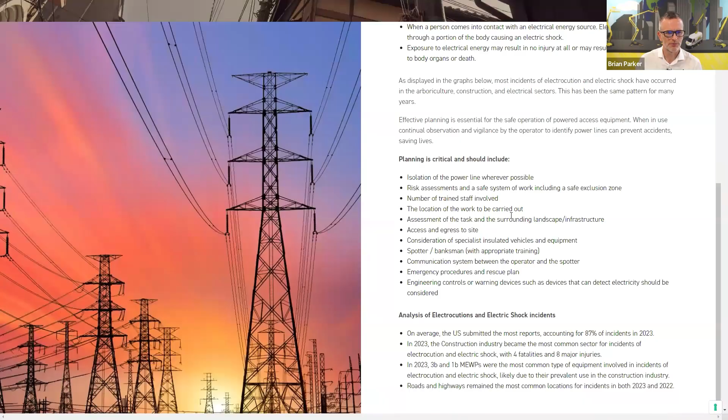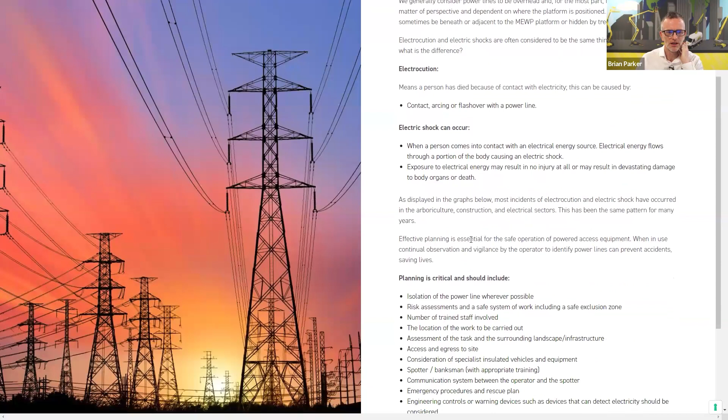So as it's first on the list, I'm going to pick electrocutions and electric shocks. Remember, I could have jumped straight down to there, or I could jump back as I wish, like you would do when navigating a website. So some headline data, some examples and definitions of what we'd deem as electrocutions or electric shocks, and then some information about planning and analysis.

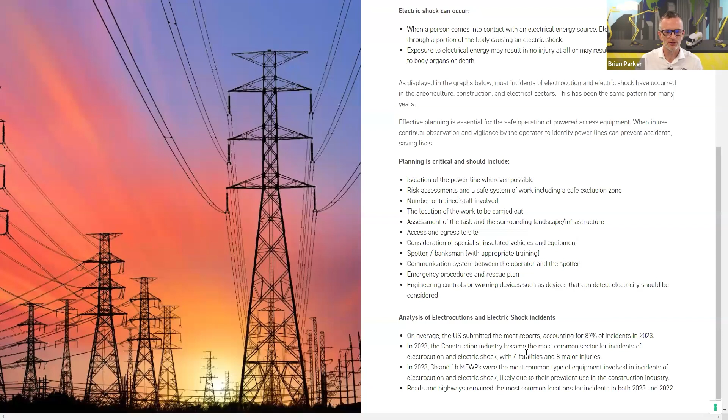One thing I'll point out is the relevant countries - earlier on the pie chart, you'll see the US submitted the most reports, in this occasion 87% of incidents. This data isn't normalized, meaning the US market is vast - one of the largest industries over there. We're talking 1.3 to 1.6 million machines over there, whereas another country might be in the hundreds or thousands. So as industry stats, just to make sure you're clear on that.

Okay, again because I've had the report up, this doesn't count up, but this would count up to give you an indicator of what it is. And we've also got whether we've got an increase or a decrease. You can see on the previous 2022 data, the increases are accordingly there.

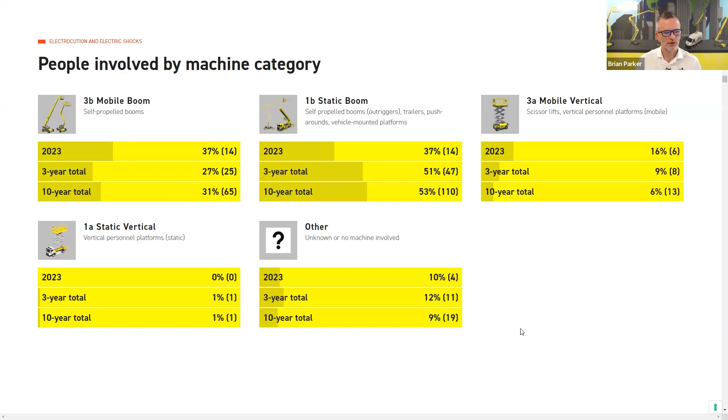So then we now move into the machine categories, a slightly different chart to give you an indicator of the types of equipment over that period. You can see in terms of 2023, the booms, scissors, verticals, and the 3A and 1A static verticals. And then when we come to countries, you can see here another bit of information on where the countries are.

As I said, US - this isn't normalized data. And then when we get to electrocutions and sectors, this is where we can start to look at different data over different periods of time. If I want to look at the 2023 data, the latest data always appears on the left, and then we can switch between various data sources to get an indicator of what's going right, what's going wrong.

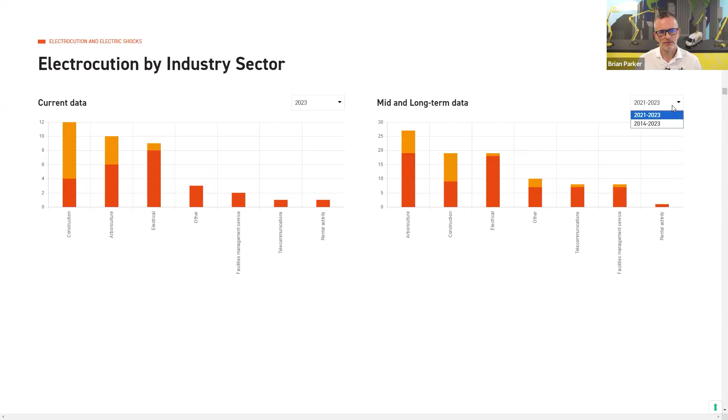You can see construction down here - 4 fatalities, 8 major injuries - but in the medium long-term data we had 19. And then the long-term data, 38. So it gives you a bit of insight there.

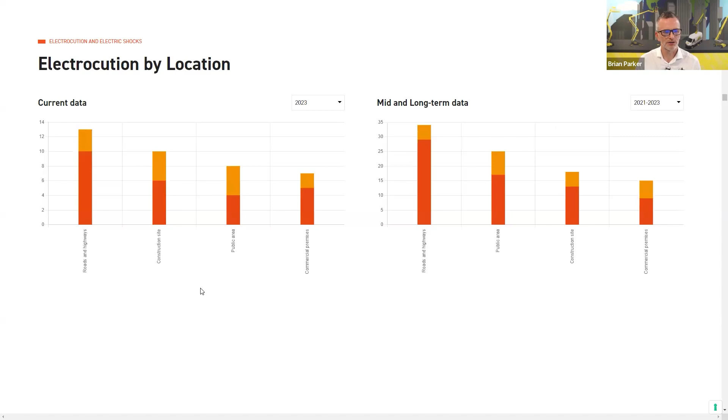We also have it by location, giving an indicator of where incidents occur - roads and highways, construction sites, a public area, or commercial premises. And then we also have resources available.

Incidentally, when you're on here, you can look for technical guidance. You can put in here what you want to search - you might say I want to look at harness - and it's going to bring up all the data you need. So it's fairly simple, fairly straightforward. Okay, and then we move on to falls from the platform.

So I'm not going to dwell too much on them at the moment, but as you can see, we hope that we're covering everything. The one thing we've also got here is mast climbing work platforms and construction sites. For those of you involved in this sector, we have limited data in this area. We're always looking for more, and we would welcome any data that comes through. So again, some really good insights into what's occurred in the mast climbing world and construction hoists, hopefully that makes sense.

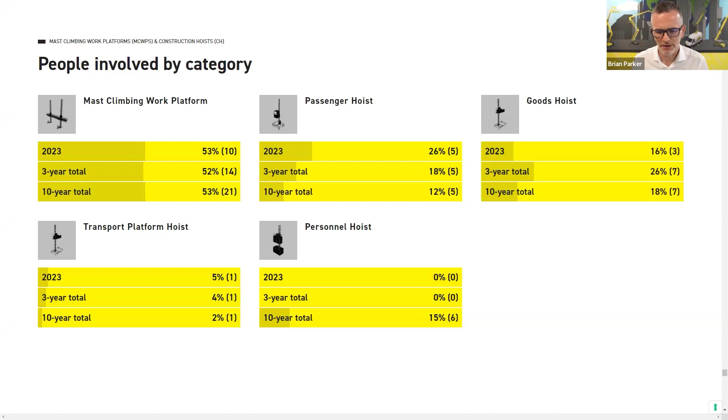I think that concludes what I wanted to show. The navigation button is really key to where you want to look. This is the first iteration of us completing this global safety report. I think we need to wait a little bit of time, see people's views and feedback, and then hopefully for future reports we can make some changes and give you more insights.

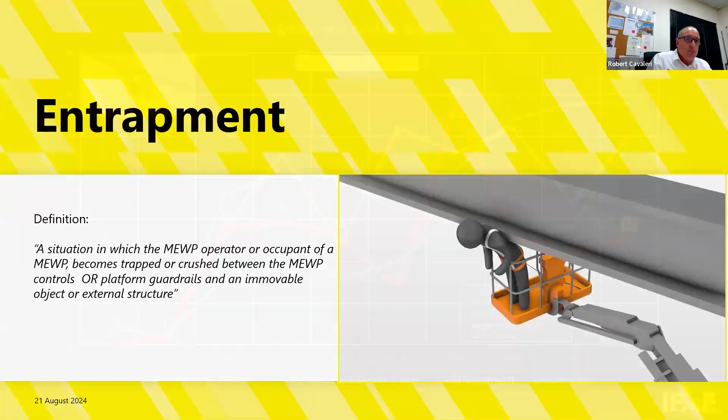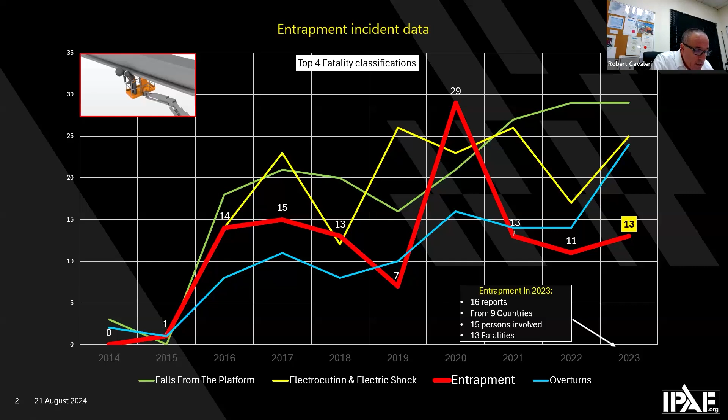In this data slide here, you can see along with falls from the platform, electrocution and electric shock, and overturns, the frequency of entrapment incidents is situated in the top 4 fatality numbers related to MEWP incidents. Next slide, please.

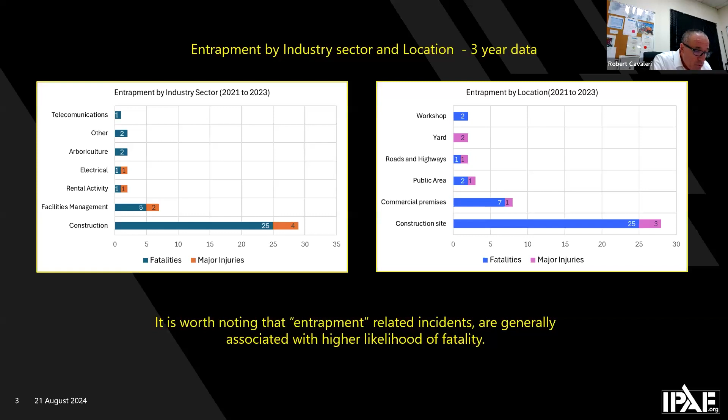On this slide here, you can see entrapment by industry sector and location, and this is 3-year data. It's worth noting that entrapment related incidents are generally associated with a higher likelihood of fatality, and that construction activity by industry and location continues to be the MEWP use application where entrapment is presenting most frequently. Next slide, please.

1, not watching in the direction of travel or movement during operation, and this can be in the elevated or transport position. 2, incorrect control function selection. 3, confined, congested area use, and lack of operator skill. 4, erratic or overspeeding control use in the driving or boom function. 5, poorly maintained equipment or using faulty equipment.

6, uneven ground surface conditions and not considering this in the planning phase. 7, over-reliance on secondary guarding, which comes under the complacency heading. 8, lack of competence for managers and supervisors in the planning phase—there's a great course called MEWPs for Managers which addresses this, one of the IPAF courses available. 9, leaning out of the platform during manoeuvring. And 10, incorrectly adjusted drive or lift function ramping gain or threshold.

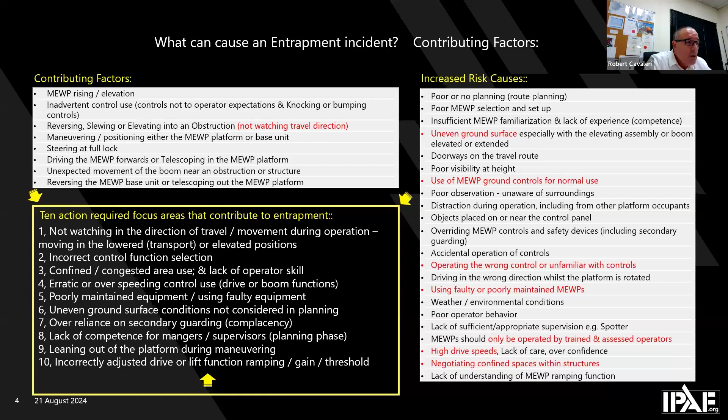That's a technical thing, but sometimes when using MEWP controls they can operate abruptly or unexpectedly. And I have 11 there as well, not showing on the slide, which is use of the MEWP from the ground controls for normal use. We should know that MEWP ground controls are intended for emergency use only and for pre-use inspections. If we're using them for normal use, we can significantly increase the likelihood of entrapment, not only for those in the platform or basket, but also for the person operating the controls from the ground station.

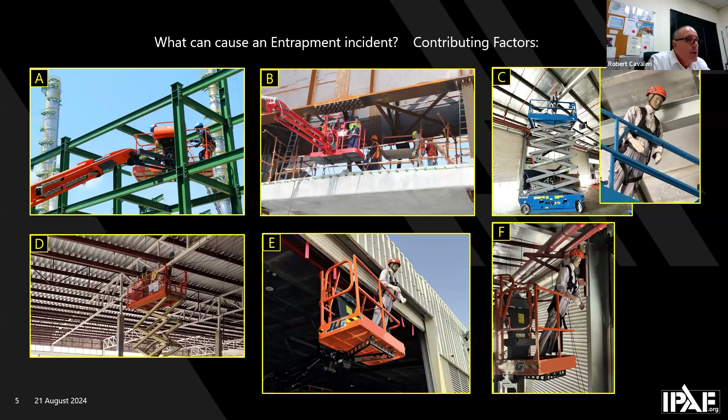Next slide, please. So we're still in causation here, and this slide shows photos of applications where entrapment could present in many industry sectors. You can see here we're looking at congested areas, maybe steel structures and beams inside workshops, maybe the lighting has been compromised as well, moving in and out of doorways or in and around congested areas. Next slide, please.

This primary guarding switch requires two intentional commands from the operator. And if the safety switch component is not working, that means the switch can actuate a function unintentionally, and that can potentially lead to an entrapment situation.

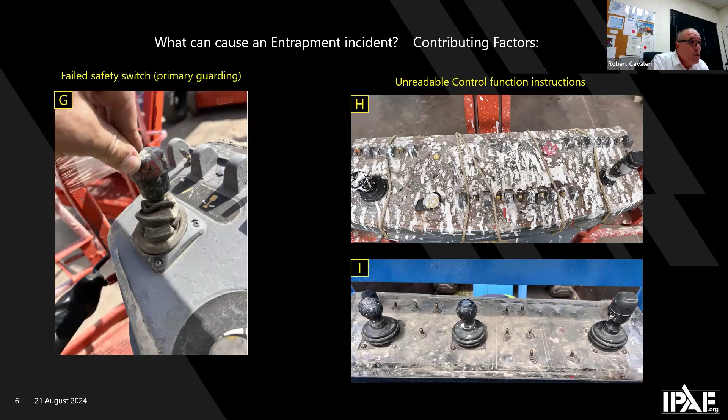They are switches fitted to poles, contact poles. So if these poles come into contact with an object or structure, the MEWP functions will cease and an audible visual alarm will go off.

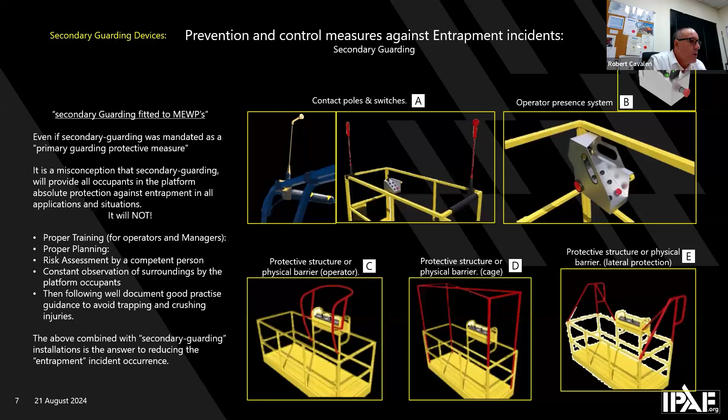Next slide, please. So still on prevention here. These 5 pictures, A, B, C, D, and E, show control measures via secondary guarding, and these represent currently the most common secondary guarding devices fitted to boom-type MEWPs. These can be classified as either reactive contact devices or breakaway bars and contact alarms, depending on the manufacturer.

And how they work is, if an operator makes a mistake, they push up against these bars or these contact devices, functions will cease, and it provides some wiggle room for the operator to fall to the platform if they've been injured, and then for the emergency rescue plan to take place. Sometimes controls will be reversed, drive or some boom functions can be reversed also, and audible visual warning devices will sound, alerting those below that an entrapment situation has occurred.

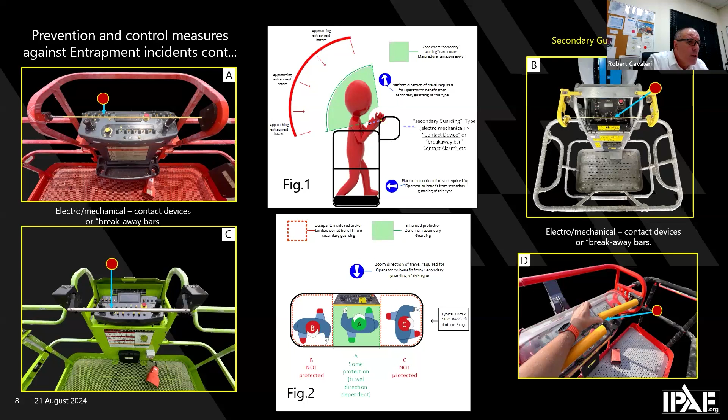And the same with figure 1. The secondary guarding will be more effective if the basket is moving in the direction of the blue arrows there for it to actuate correctly. Next slide, please.

Now I'm moving into what we call secondary guarding via proximity sensors, for example ultrasonic sensors. So one improved control over entrapment can be via the use of proximity sensors that can utilize sound waves, ultrasonic, and or radar wave technology, or LiDAR, laser light. These systems offer more proactive rather than reactive measures and can offer greater protection coverage of the basket or platform area and its occupants. They also offer increased functionality, for example speed reduction when approaching objects.

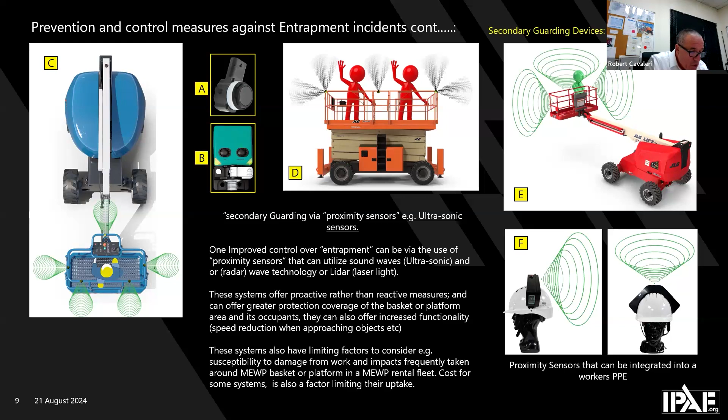In picture A and B, you can see examples of proximity sensors that can be installed on MEWPs as a component of secondary guarding. Pictures C, D, and E are graphical displays that show how this technology beams out, providing awareness and increased protection against entrapment incidents. Picture F is an interesting one - it can be referred to as enhanced operator protection that can be included in the operator or occupant's personal PPE equipment, so ultrasonic sensors fitted into the head protection devices of the MEWP occupants.

Okay, next slide please. And here's a short video. Please watch this video - it's about awareness examples of the entrapment incident. Please play the video.

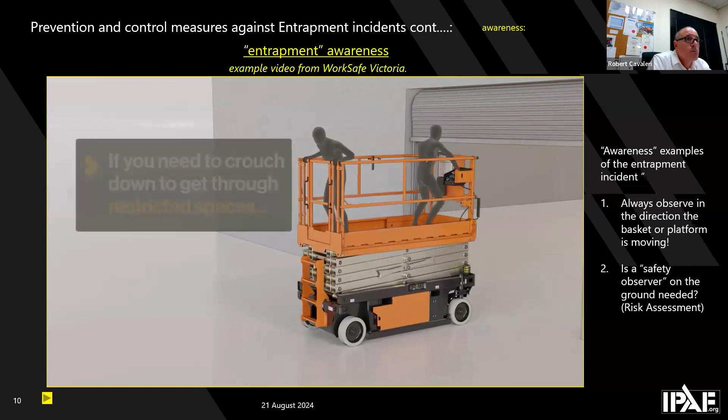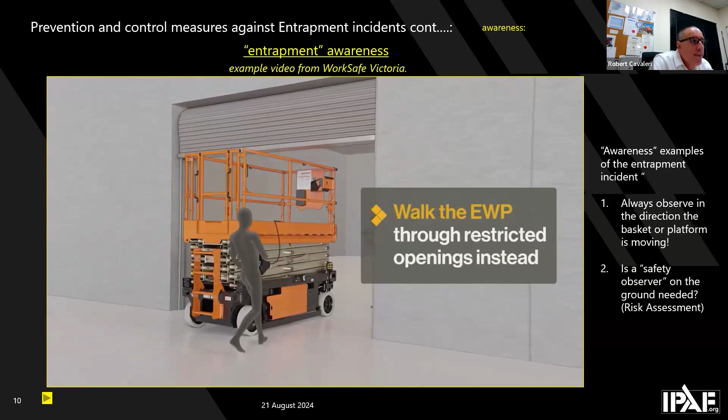Okay, so some good awareness examples of entrapment incidents there and some of the recommended control measures. Next slide, please.

So this is my last slide, and this is on the control measures to avoid entrapment. I'd like to first focus on the document on the left-hand side. This is IPAF's good practice guidance for reducing trapping and crushing injuries to people in mobile elevating work platforms, and it contains everything you need to know to understand and reduce the incidence of entrapment. I really recommend that document, helping us to be prepared for entrapment and reduce its likelihood and respond appropriately.

Please remember that one of the biggest challenges related to entrapment incidents has been the lack of awareness that an incident has occurred at height. This needs to be mitigated when preparing your emergency and rescue plan. Entrapment incidents are often serious in their effect to the human body, so early awareness and fast response are very important. So that's it for me today, my entrapment awareness presentation.

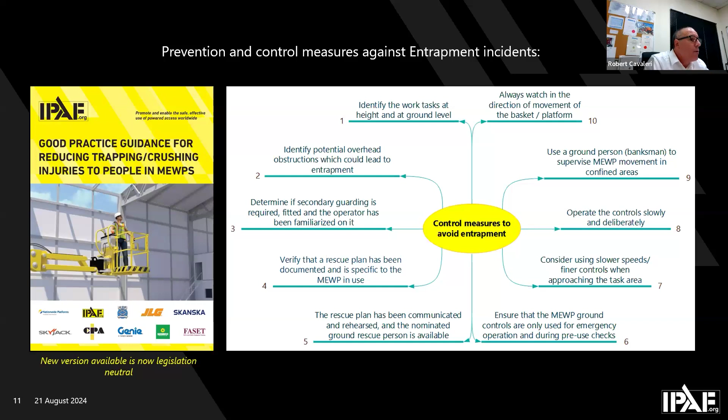Brian spoke earlier about electrocutions, and our 2023 campaign was about preventing electrocutions involving MEWPs, given the fact that it was one of the biggest causes of deaths within the powered access industry. The guidance document is around electrocutions and electric shocks, and it's intended to provide information for those of you who plan and manage MEWP operations.

It covers the main causes of electrocutions, particularly looking at power lines. It raises awareness to the hazards and risks in working close to power lines, and it talks about the industry sectors where electrocutions and electric shocks occur. It will help you identify the control measures needed for any risk assessments and safe systems of work to reduce the number of incidents occurring, and it will provide general global guidance for those of you who undertake these tasks.

As Brian has said, and as we've covered earlier in the presentation, IPAF have had a particular focus on de-legislating our guidance so it can be used in any country across the world.

If we look at the last graph in the presentation, you can see that with mechanical and technical failures, we saw quite a large spike in the number of incidents in 2019 to 2020. We really don't know what caused this, but there is a possibility that a lot of MEWPs were stood down during COVID and then returned to service.

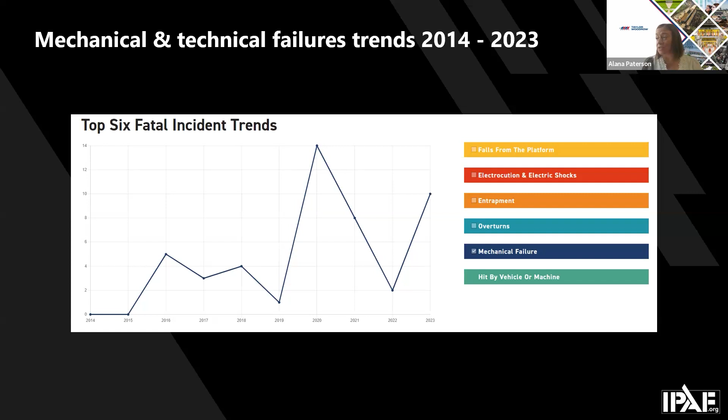The last thing I would like to talk about today is reporting incidents on the IPAF accident portal. As chair of the IPAF International Safety Committee, this data is hugely important to our committee. It's the information we use to decide on campaigns and focus areas, and we use it to work with IPAF to decide what guidance we want to give you, and what things you need more information about.

IPAF and its members share data involving powered access equipment to allow us to identify the risks and common trends, which, as I've said, inform the guidance, training and safety campaigns. We aim to increase our understanding of working practices and reduce incidents in every country across the world.

The reporting is not restricted to IPAF members, or to any person or organisation. Anyone can report an incident. IPAF gather information on incidents involving not just MEWPs, but mast climbing work platforms and construction hoists, which at the moment we don't have a huge amount of information on, but it would be great to get more information on incidents involving those pieces of equipment.